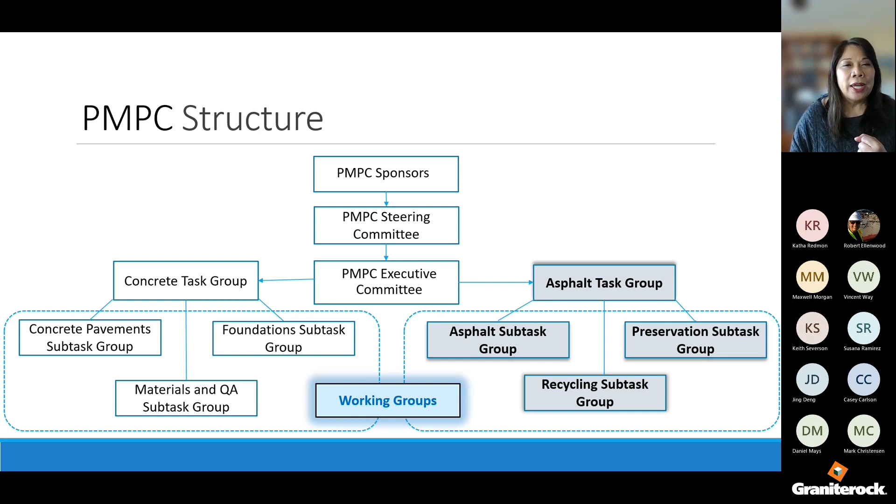So the next tier is the QAP program. Now, Caltrans as a DOT, we do need a QAP program approved by FHWA. And we have an extensive program that involves IA, our joint training and certification program that we do at METS, and our construction acceptance chapter in the construction manual. This is all part of Caltrans' QAP program.

So if a local agency is using federal dollars on a national highway system project, they must have an FHWA approved QAP. We all know federal money comes with a bunch of strings, and this is one of the requirements that's stated in the CFR. Now, local assistance at Caltrans has a great website that discusses quality assurance program options for smaller local agencies. But here's the nutshell of it. And this is all from the local assistance procedures manual.

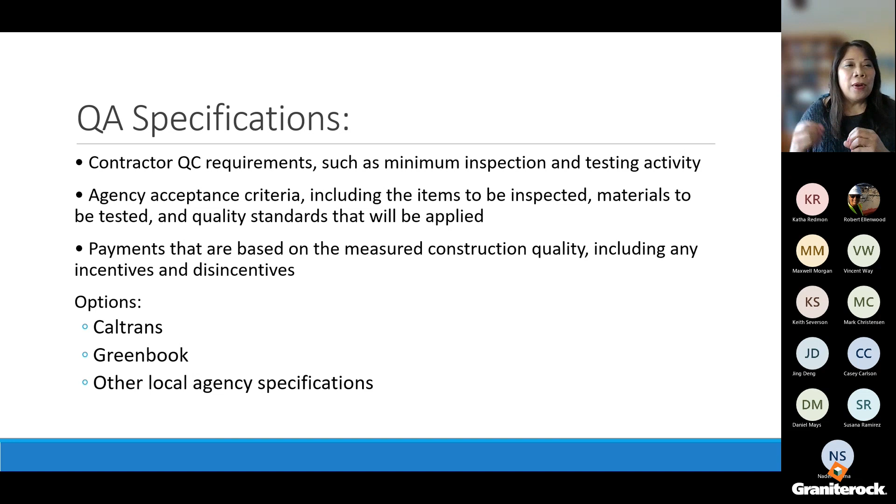And I do also know from Graniterock, you have Frank Rankador. I see Frank frequently. He is at every single technological event I'm at. So he is really up to date as to what's going on out there in the pavement world. And so there really are several options to look at when you're looking at specifications, that doesn't have to be Caltrans. And I know back in, I want to say December at that Tech Talk, Brandon really dove deep into the hot mix asphalt specification for local governments.

So I'm going to completely switch gears at this point, but that is my discussion on where you can find some latitude in your specifications, what the requirements are, where you have some wiggle room. And I know it's a lot of information, but the main message I'm trying to share here is you don't have to just use Caltrans. There are other options, and there's some good specification templates now that weren't there before.

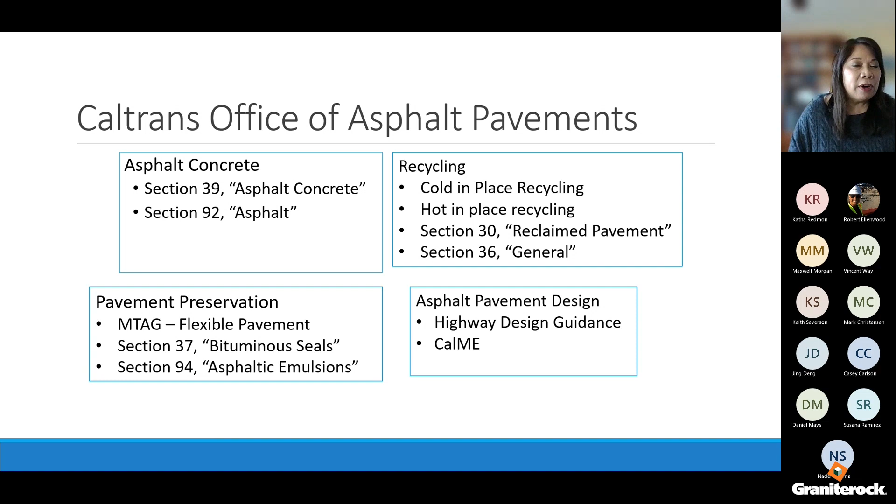So one of our first pilot projects is recycled asphalt shingles, basically taking roof shingles and putting them in pavement. Many states have recycled asphalt shingles specifications. We are still working on getting that language in our specification. We do have one project that was done in El Dorado County with a full report and evaluation by UCPRC. That's available on their website, or I'm happy to share that report. We also have one RAS/RAP project going on in District 10, which is in the Stockton area. So we are looking to find a way to give the designer an option to use some recycled asphalt shingle material in the pavement.

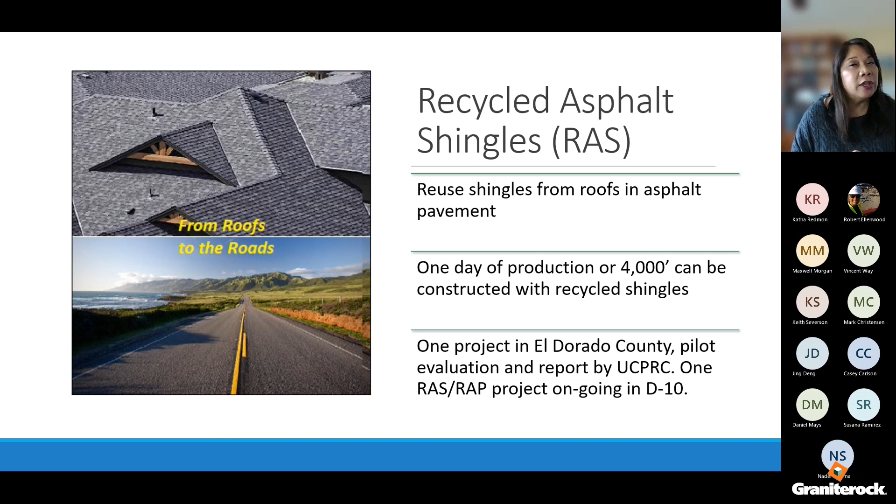The next pilot we're looking at is 10% RAP in RHMA. As I'm sure everybody knows, we at Caltrans use a great deal of rubberized hot mix asphalt. We have basically 35% usage in the state. Since we are looking at RAP, recycled asphalt pavement, how much RAP can we put in RHMA? We're starting with 10%. We have about 7 pilot projects going on right now. So this is something we're excited about, another way to recycle in one of our biggest, in RHMA.

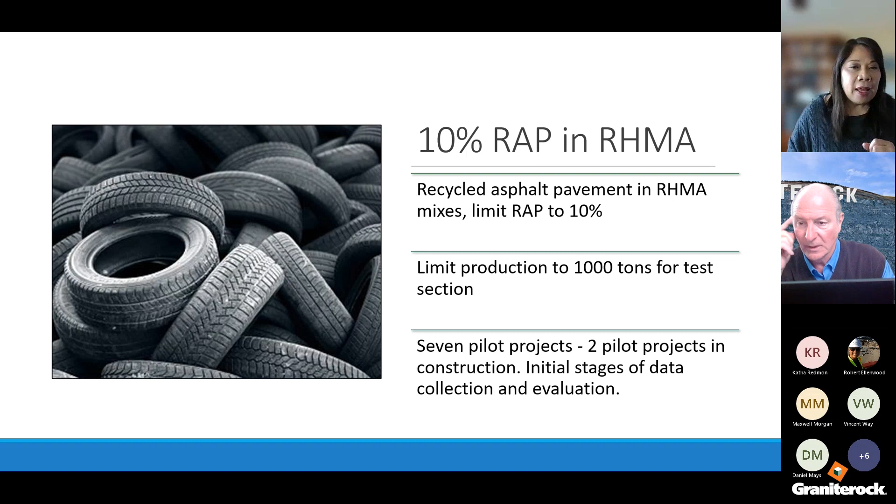Cathrina, can I interrupt you just a minute? Yep, sure. Back on the shingles, is there a percentage for that as well? We're looking at 3%. So I think that's part of the spec development, but yeah, about 3%.

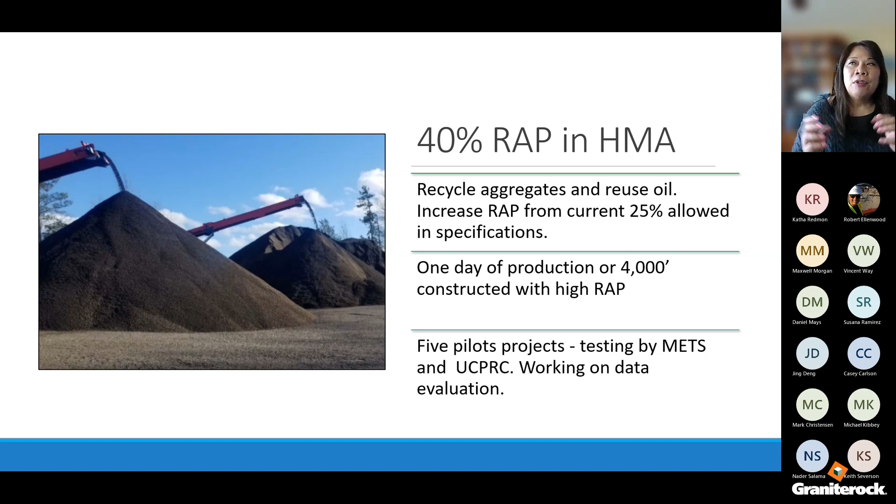We are looking and testing at basically 25%, 30%, 35%, 40%. And it is quite extensive, but we are learning quite a lot about how we're going to implement higher percentages of RAP in our hot mix asphalt. On this slide, it talks about this 1 day of production or 4,000 feet. That's basically our ideal pilot quantity. So we have control, and then we want a pilot section, basically 4,000 feet or a day of production.

This is another pilot project we're going through. This one's almost done. There should be a report coming out soon. This is something that was industry driven, in the sense that normally we do our gradation before production. And so this is actually the gradation on the final product. So after we determine the asphalt binder, then we do the gradation on the aggregate.

There were 16 projects that used the NSSP for post-plant gradation. And like I said before, we're pretty close to being done on this one. We have a lot of data on it, and we are looking for a final report in the next few months regarding this particular pilot project.

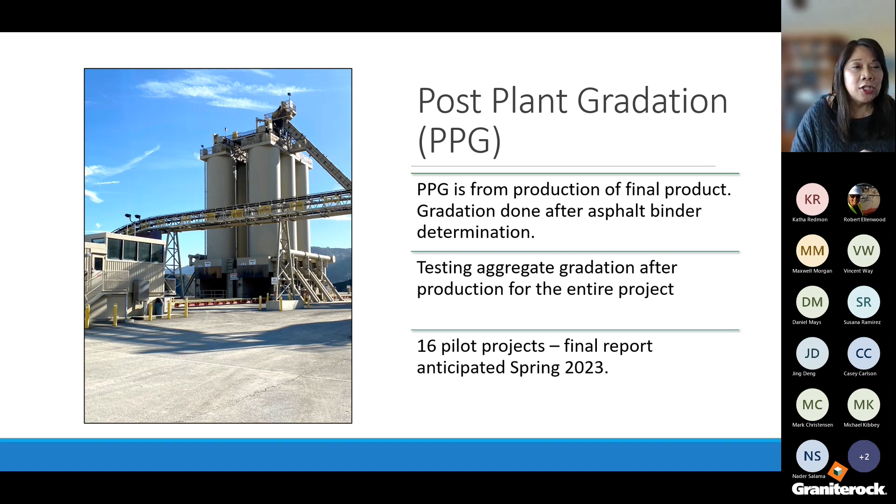Another pilot we're doing is in-place recycling, cold central plant recycling. This differs from current in-place recycling because a mobile plant, for lack of a better term, is set up closer to the job site. So instead of having a big recycling train, you can mill up the existing pavement, you truck that material to the cold central plant, the recycling happens there, and then it gets trucked back to the job site and placed.

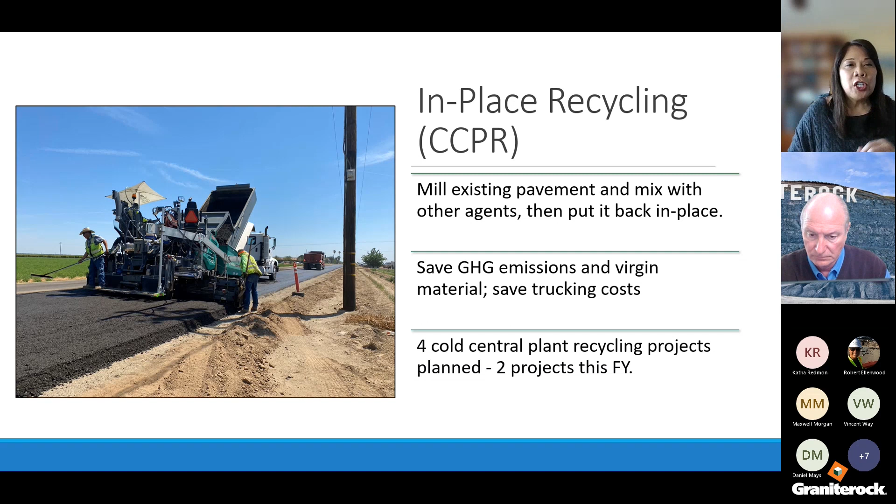So we're hoping to save greenhouse gas emissions in the sense that there's not a larger train. It saves on trucking costs. And again, with recycling, you save on virgin material. So we have 4 pilot projects coming up this year looking at this particular recycling method. I've got a couple more slides.

Sorry, I'll stop you there for a minute. Where are those pilot projects? Oh, I'm sorry, there's one in Fresno and there's one planned for San Bernardino.

With the districts, and I guess maybe this is my little plug too, I always say we do have funding available for pilot projects. There are some rules that go along with the money, right? But if a contractor has recommendations saying, hey, I want to try this product out on a project I'm working on, we are always open to that discussion. We may not always say yes, but we'll talk about it.

All right, good. Thank you. Appreciate it. Yeah. All right.

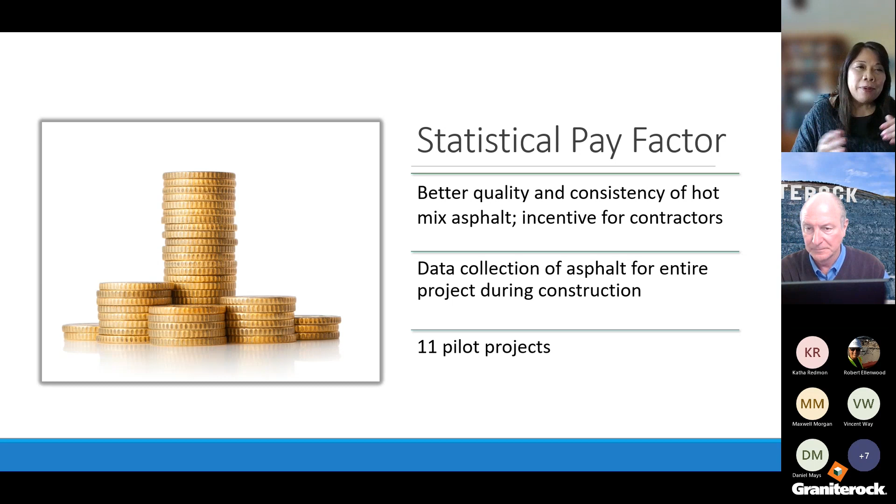Statistical pay factor is something we're looking at. Basically, it's paying on the statistical bell curve. So ultimately, if we get a tighter curve, this can incentivize higher payment for the contractor. So we have quite a few pilot projects going on with that.

We're looking at fibers in HMA. This is something driven by Caltrans. We want to look at it as improving fatigue resistance and durability for our thin lift overlays. So we have about 3 or 4 pilots with fibers.

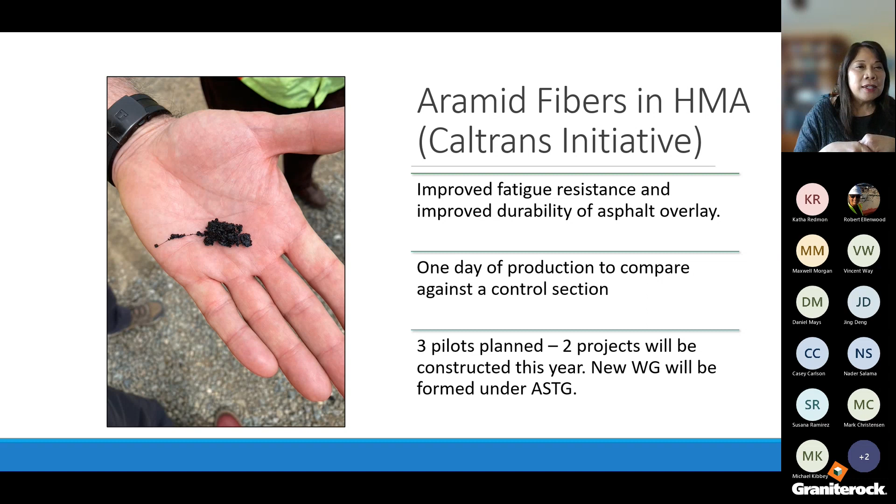And then last but not least, because we are looking at more sustainable ways in the department, there are companies that use RAP in chip seals and slurry seals. They're mostly in Southern California, but is there a way to put more RAP in our chip seals and in our slurry?

Because obviously, again, you save GHGs, you save virgin material. So we have one pilot next fiscal year, and we're going to form a group under the preservation subtask group to look at using RAP in slurry, RAP in chip and slurry.